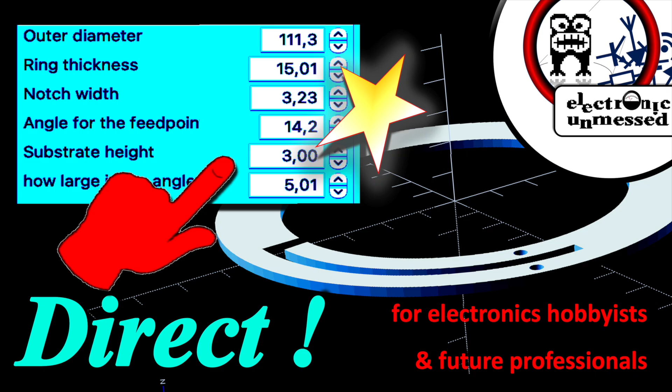We made the design and the construction of the antenna easy. And we're giving an overview on the options over a wide frequency range.

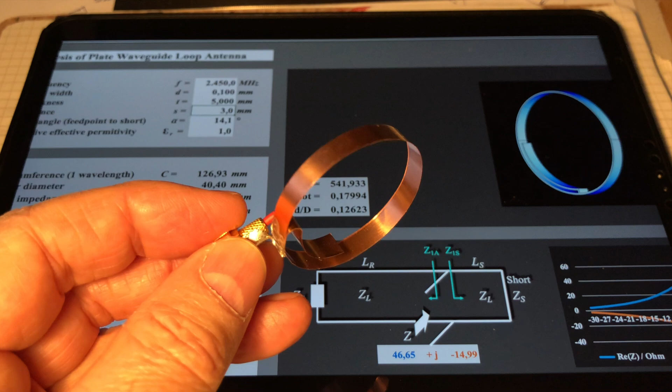We are pleased about the great interest in this antenna type. Meantime, there are a number of references for Wi-Fi, amateur radio, LoRa, and even as a feeder of a 1420 MHz amateur radio telescope. I would like to take this opportunity to say thank you to all the viewers who gave so much valuable feedback and initiated interesting discussions.

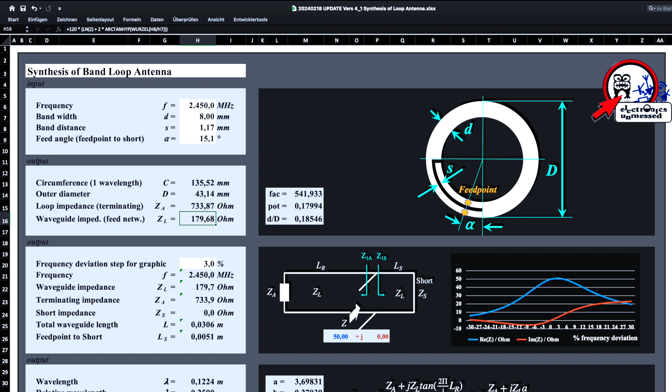Today there is even an additional useful tool for everyone to take home. Thanks to Al, we can share a really useful OpenSCAD script that I would like to introduce in this video. But first I'm giving an overview, since we gradually expanded our Excel tool to a number of different designs. Version 4.1 contains all options, made from wire or tube, from conductive foil, as a printed circuit or on substrate, milled from solid metal, as well as made from strip metal.

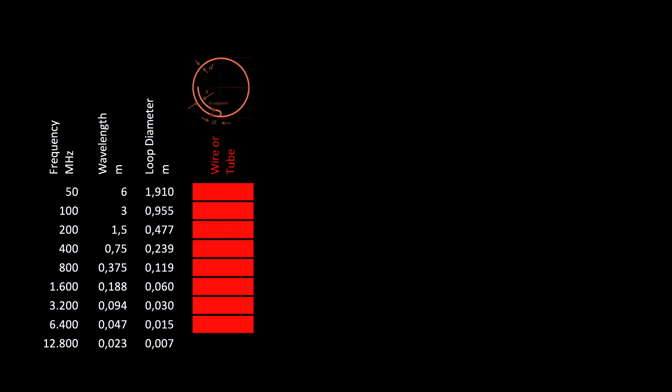Meantime, wire design references are comprising 435 MHz, 866 MHz, 1420 MHz and 2.4 GHz. At higher frequencies, the diameter eventually becomes too small for soldering the antenna. However, a diameter of 15 mm is still feasible, which corresponds to a frequency of 6 GHz. For 145 or even 70 MHz, corresponding to a diameter of 66 or 136 cm, a skilled craftsman could build it from tubing.

The construction and tuning of the wire design requires some skills, so we started thinking about easy, reproducible designs. Planar designs turned out to be a good solution for that. You can cut a planar antenna from a conductive foil using a paper template. It is even better to 3D print a carrier and simply glue the conductive foil on. We tried both methods for 866 MHz. You will find videos about it on this channel.

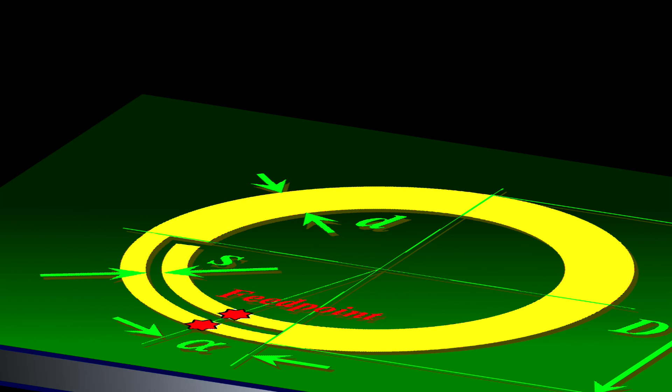A 3D printed carrier is suitable for 400 MHz up to about 1.6 GHz, depending on the accuracy and size of your printer. Using a big wooden carrier, the planar antenna could cover the range down to 50 MHz. The printed circuit design is certainly interesting for mass production. Please note, the dimensions differ from the simple planar antenna, as the permittivity of the substrate must be taken into account. It has particularly strong influence on the impedance matching network.

I think the design is feasible for the frequency range from 400 MHz to 10 GHz, with a high quality substrate certainly much higher. Using this principle, you can also build a foil antenna for lower frequencies stuck onto a pane of glass, for example. Experiments in the 2 meter band are on our agenda.

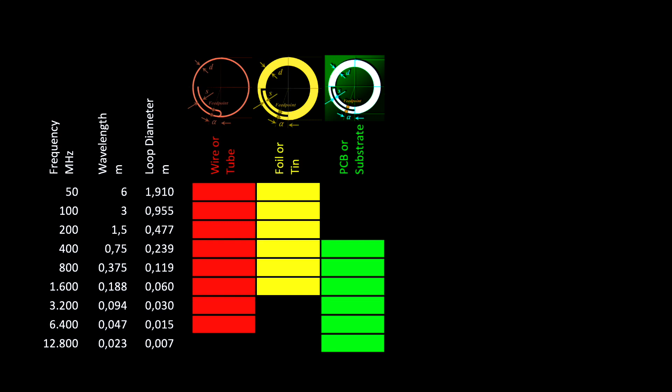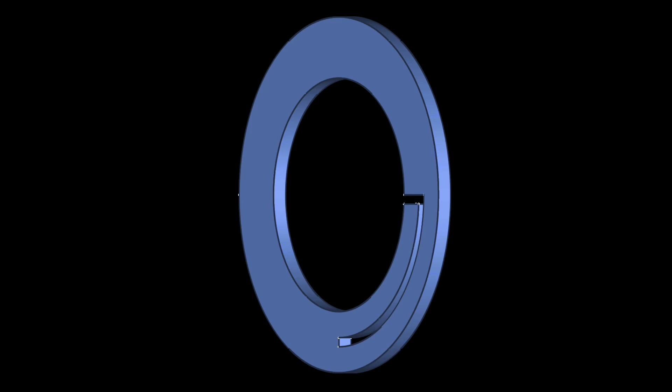In my mind, the most stylish design could be achieved by milling the antenna from aluminum or another good conductor. An alternative would be printing the body with PLA material and covering it with a conductive foil. We know that high-frequency currents only flow in a thin outer layer of the conductor anyway, due to the skin effect. Actually, there is no size limit of this design, however, it is getting expensive at low frequencies.

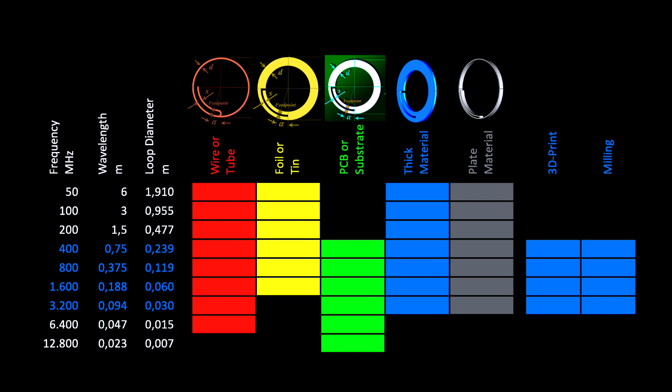Makers know it. Flat material is inexpensive and easy to assemble, so this design is particularly suitable for DIY. Originally, for this design we thought about large antennas down to 50 MHz. However, as you can see, it works very well for 2.4 GHz too. In a nutshell, the frequency-dependent antenna diameter is finally determining our realization options. A good fraction of this frequency range we can cover either as 3D print or as milled part.

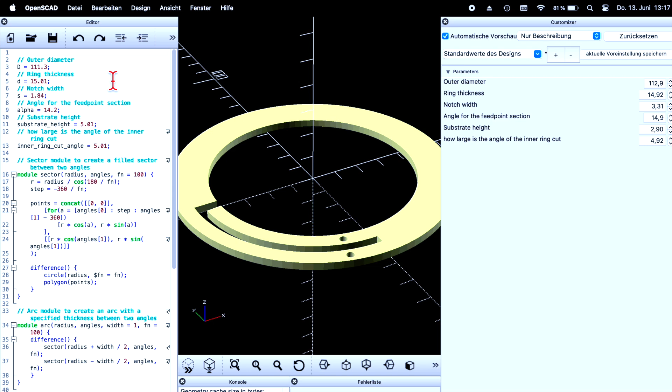In that case, we are using the data from our Excel tool as input for a CAD program. I must admit, this is a certain effort in case you are not an experienced CAD user. However, instead of the CAD program, there is now a much easier solution. We are really happy to have viewers with great ideas on electronics unmasked. Al provided us with a great script tool, which we can even share here on the channel. OpenSCAD is a pretty simple tool that runs on your PC without any major installation procedure.

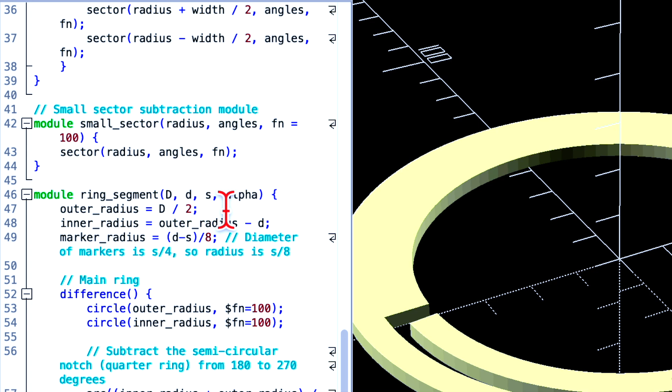The script is literally doing the design work for you. Kudos to Al. You're just entering the calculated parameters, then OpenSCAD creates the three-dimensional body, which you can export as an STL file.

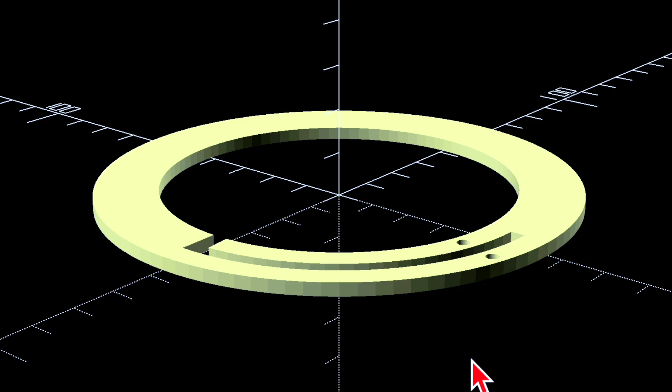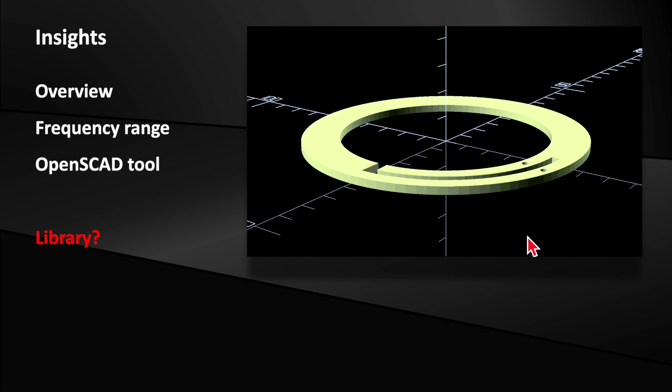I gave my assessment based on practical and economic considerations. There are no hard limits for the frequency range actually. The OpenSCAD script is a really clever trick to avoid the design effort using a CAD program. Perhaps we will create a library containing antenna dimensions and ready-made STL files covering common frequency ranges.